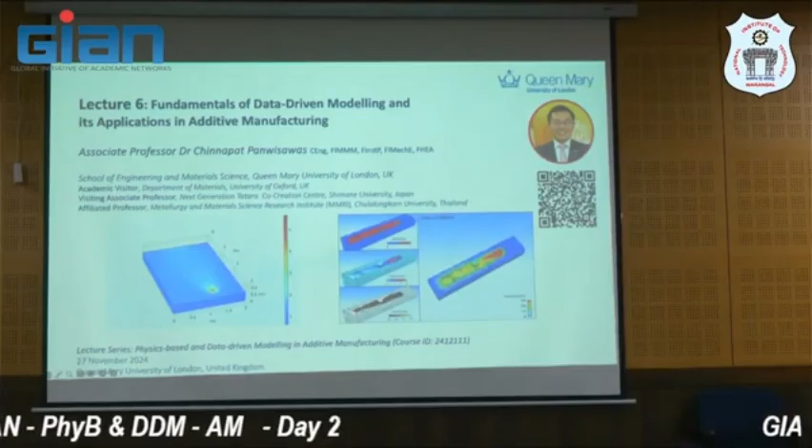Yeah, and this area. This fellow is making a lot of sound there. Kind of noise it is making. Okay, so I'm sitting here.

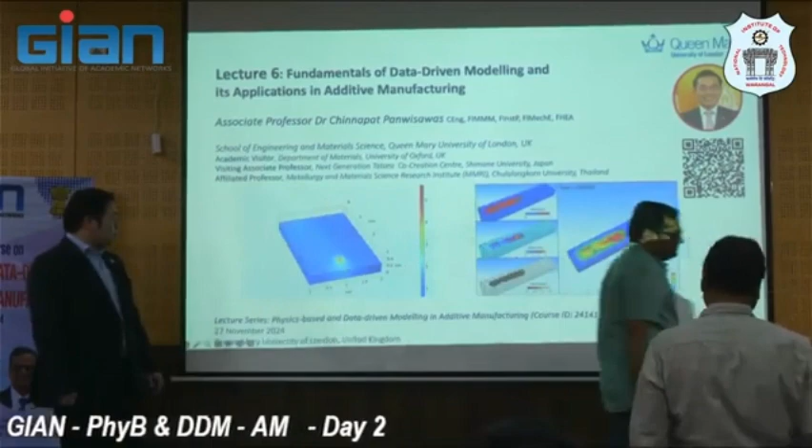No, they are suggesting that if this microphone, that fellow is making sound. If you switch off also, that is making noise.

It's okay. Are you able to manage like from here like this? Maybe. Yeah, okay. Sure, I'll try. Sorry for that. No problem, yeah. Making a lot of noise. Yeah, but only this one is quite quiet.

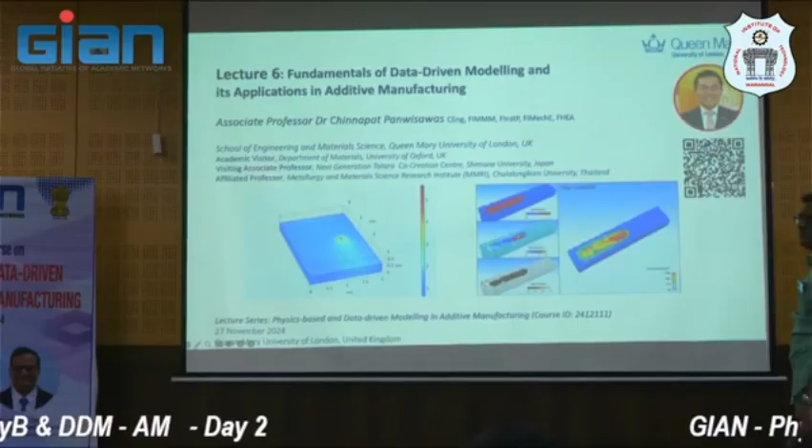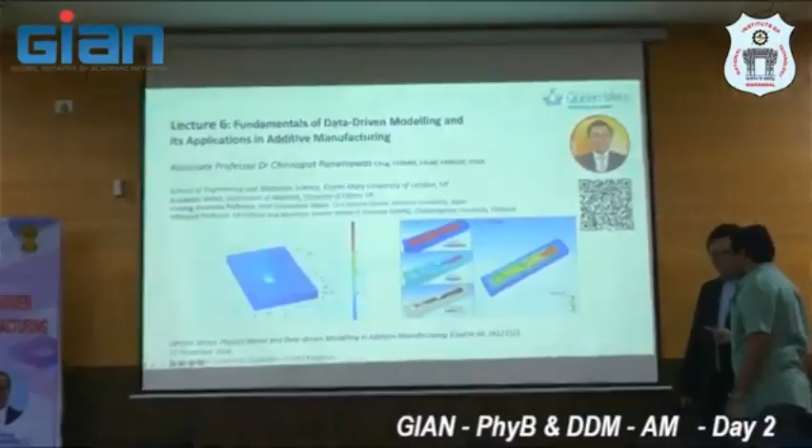I think probably, yes, probably it's time to start.

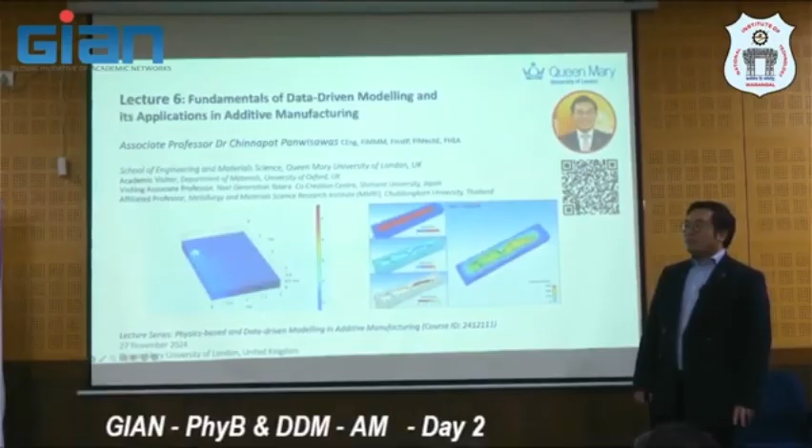So shall I start or? Wait, okay. So they are going to switch off the entire AC in the hall. That's what they are saying. That is the solution.

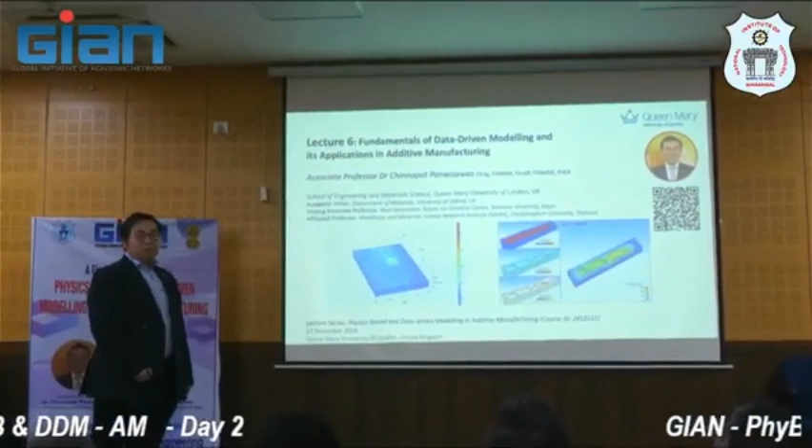Yeah, shall we start? Good morning, everyone. This lecture is actually dedicated to the fundamentals of data-driven methods and its application in additive manufacturing, basically simulation as well.

So I just want to start this lecture with these two examples. It's actually trying to predict, not exactly the same, but trying to do something for 3D printing. One is quite high fidelity modeling, another one is more simplified. So we'll talk today about how can we actually choose or how can we make this rapid calculation for data-driven simulation.

For example, so in order to start the presentation, I just want to begin with, I think we don't know much each other, so I just begin with what I'm interested in terms of research.

So my research lies into, you may know, I give a lot of things on the computational material science and engineering. And then using multi-scale multi-physics modeling, this is one of the things that you saw in the past two days, is actually related to, mostly, my research area.

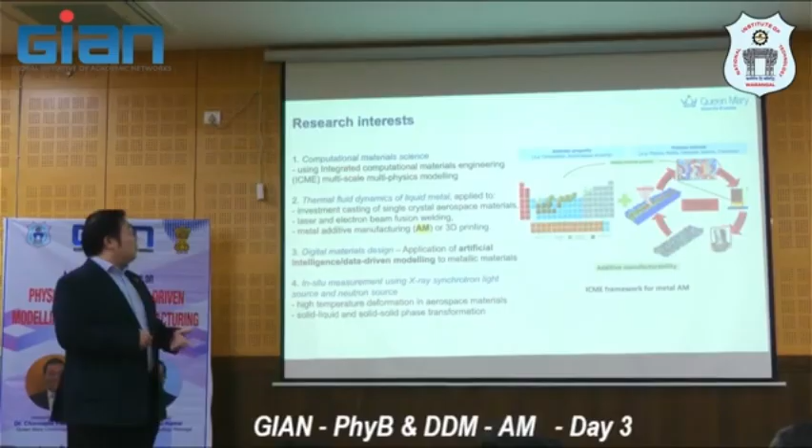And then especially looking at the thermofluid dynamics of liquid metal that can apply not only to additive, but also for casting, welding, and all laser melted or molten pool dynamics here.

And this is the thing that I think I'm also interested in, which is about the topic of today's talk. This is a digital material design.

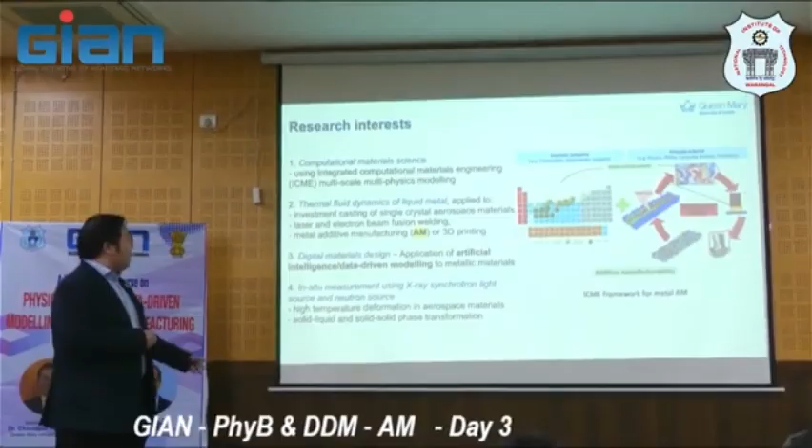So you will see that we need to use artificial intelligence and data-driven modeling to understand what is happening in the metallurgical process. And then I want to actually work with experimentalists, especially in-situ experiments through synchrotron or neutron diffraction or imaging to understand the behavior of the material during the process.

So it's quite fundamental understanding, not really going to the end user. But what we try to do is a fundamental for additive manufacturing that allows us to establish something more scientific-based model. So I hope to also highlight some examples that we have done.

So this is actually related to the model and the X-ray synchrotron published, I think, early this year in Nature Communications, for example, and also understand the phenomenon happening in additive manufacturing.

So physics-based model is basically something that we know is more preferable for the scientific community, but probably we need to find a way to actually validate it for sure, whatever how difficult it is, but with the most delicate or more advanced technique that we can use to look at what happened.

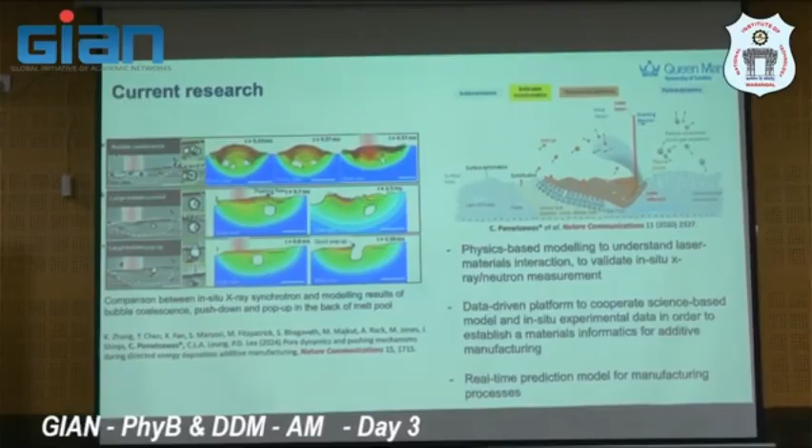At the same time, we also want to build this knowledge in order to build a science-based data-driven platform that can enable us to get some data-driven model established toward material informatics for additive manufacturing.

So the keywords here are quite important. From the material informatics, something I will give an example on the last day, the final day of this short course. And then another thing that probably benefits, someone will say about digital twin, is actually what we call real-time prediction for the model that we are going to give a bit of information today as well in this lecture.

So the next one is a more complicated thing. It may look to me, and probably to you, that it's not really additive anymore, but it's actually relevant in terms of fundamental understanding of chemical thermal fluid dynamics during the non-equilibrium microstructure process.

This gives us insight into extra information that I've probably dedicated one single lecture for, probably tomorrow as well. This is something I just want to share with you. This is a digital twin that we were probably the very first to publish for metallurgical process, using what you may know as a decoder or encoder for artificial intelligence or deep learning network.

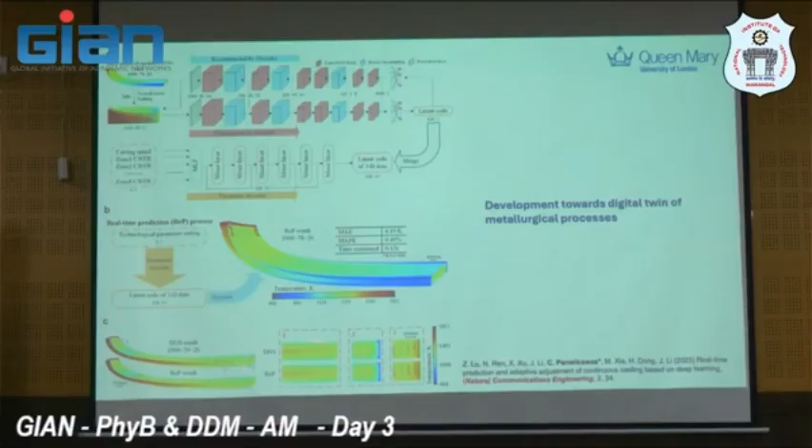This is not additive, but this is a casting for steel, so this is continuous casting in steel. You see that the model captured this characteristic in the physics-based simulation very well. So we hope we can develop toward this. Without any fundamental model here, we cannot get reliable prediction for the metallurgical process we're interested in. So this is just something to give you some background.

But before we go into the real content of data-driven, I want to say something about the buzzwords people use: data science and big data. There are two things to be aware of. Data science is actually the backbone for the next Industrial 5.0. I believe that. It's an integrative interdiscipline that bridges.

It integrates over computer science and technology, mathematics, statistics, and knowledge-based areas like material science or related areas. That brings into this big picture, meaning you need to work with a lot of people to make things happen.

This is also quite interesting for the characteristics of big data. Big data is not just the data, but you need volume of data, important whether small or large, or value of data - what does that mean, how useful the information you have, and then how accurate and reliable. This is another important thing: what is the type of data? Is there systematic correction of data to get reliable prediction or not?

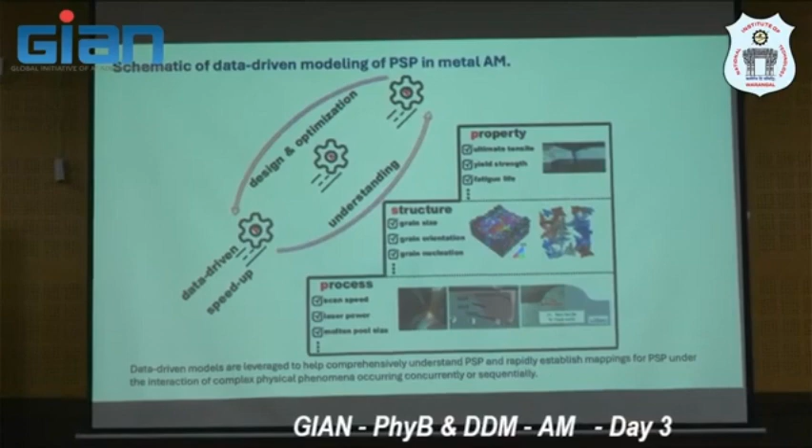Having said that, I want to open the scene of today from this paper on data-driven modeling of process structure property relation in metal additive manufacturing. You may hear a lot from me about the need to link process structure property relation. This is really the case for additive manufacturing to be successful - we need to link all this information together, not only from the physical model we're trying to do, but also the digital model as well.

So in order to speed up or make it data-driven, you need to understand the process, what happened at the process level, and the emerging structure. If it's small scale, we call it microstructure - grain size, grain orientation, grain nucleation. Then the property results from this structure. Understanding this is something we're trying very hard to do. It's not that easy to link, as you may appreciate from the last few days.

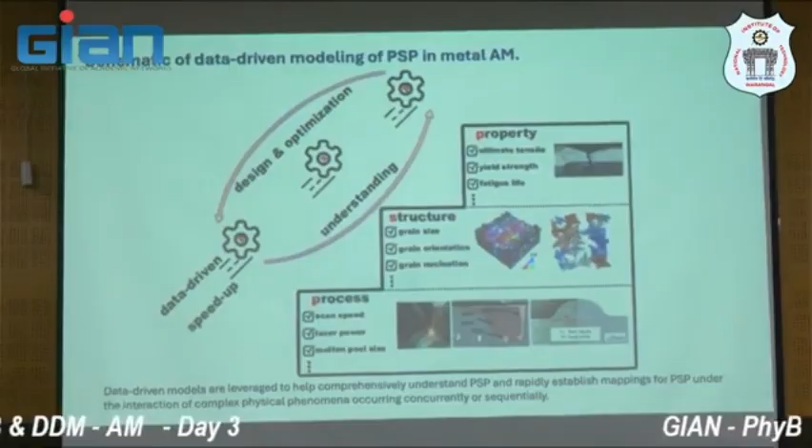At the same time, we need to close this loop to get optimization, design and feedback. Hopefully the data floating around here will be useful to develop comprehensive understanding of this process structure property relation, and then we can establish a model driven by data that gives comprehensive physical understanding. At the end of the day, industry wants quality control of their product, for example.

So the missing part at the moment is the brain for the machine learning. As a community, I believe you agree with me that we need to do something to enable science-based, physics-based, material science, or metallurgical-based knowledge for data-driven approaches.

So in order to do that, this is a conceptual diagram. For each sub-figure here, this is data-driven for the process model. I have one example for this in today's lecture. What does it mean? You have simulation and experiment data fed in, with the process parameter as an input and output as the parameter you want.

So we try to make this data driven as well. It doesn't mean only additive, but we split the driven process from each component here. So for example, this one will be...

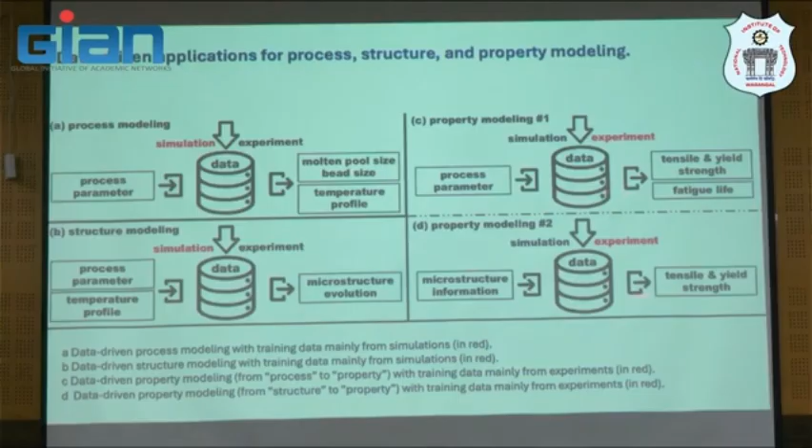Another thing is property model, which is of interest for many people. It's the same principle from process to property, or microstructure to property. Some people may look at process, structure and property, but many people look at process to property directly. Probably the link in the middle can be removed or whatsoever, depending on case by case, but we are trying to show you some examples in this area.

But it's still a challenge, as I mentioned before, that for process, structure and property, even if you do standardization or augmentation, it depends on complete integration of the data-driven model - who will be the first one to integrate and show it. Yesterday I tried to show some integration of cases in the laser fusion process that you saw. So integration is an important aspect.

Sufficiency and reliability of training data is another thing. You may need enough data to train and test your model in order to get more reliable predictions. Another important aspect, probably driven by methodology or engineering knowledge, is interpretation of data.

This is the part that's probably missing quite a lot - just data and data doesn't mean it's just data, there's also uncertainty quantification we're talking about. It's about what is the statistic or distribution of the result, rather than a single point result, for example. And then how can we use this property-structure relation to inverse design the material or component to get the part that you want.

But the next one, I think I'll start with the model that we want to make data-driven. What I mean by that is this - you may know that defects in additive manufacturing are very prominent, and we need to do something about that. Defects, which actually happen in additive manufacturing, happen at a very low scale, micro scale. Let's say this represents approximately the scale, and then the defect, which we'll discuss more tomorrow in detail in terms of engineering understanding.

But today we just borrow some concept of this. So we know this porosity is at the level of micrometers, rather than the thermal model in finite element calculation - the size of the mesh or grid is actually at the millimeter scale. So there's some mismatch between the feature we are interested in and the defect - the calculation element and the defect content don't match. So we cannot capture that in the FE calculation when we want to do rapid calculation, right?

So what shall we do? That is the next question.

Microstructure is in the scale of 10 to 100 micron. Roughness is also in that same scale, lower than 1 millimeter, apart from residual stress or balling effect, which is actually larger than the typical mesh size for finite element calculation.

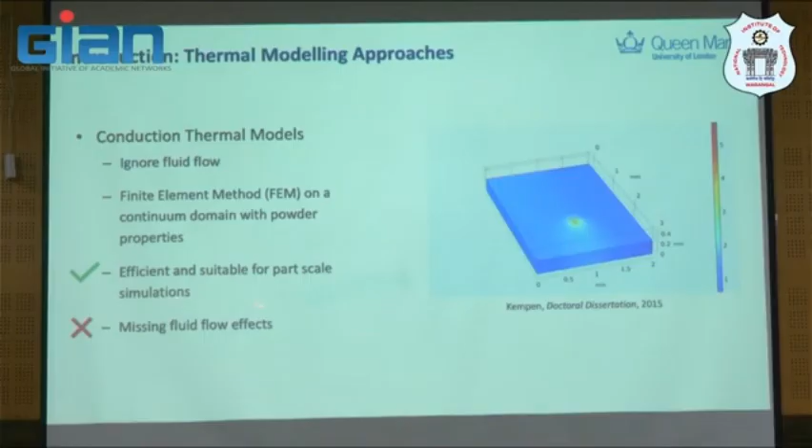I mentioned briefly yesterday that powder property is probably important. It's efficient and suitable for part-scale simulation, but missing the fluid flow effect.

Instead of that, this one is a thermal fluid model, and it uses an interface tracking method versus a flat rigid liquid-gas interface. With or without powder packing, it still provides some insight at the scale we want.

We mentioned earlier the defect scale, because that porosity is a process-induced defect, or whatever microstructure or roughness. So it's impossible for the previous model to predict it.

It's a more accurate representation, or prediction, but computationally expensive and limited to very few tracks. That's because it's limited by the computational resources you have.

So now probably you can print about 5 to 10 layers without any issue. But anyway, the objective of this particular piece of work is to try to build a framework for reduced order modeling.

Basically we want a clever thermal model that can take all the information of the fluid flow into account somehow. So we try to use temperature-dependent properties of powder materials, and take into account the effect of this by empirical or analytical equations, whatsoever.

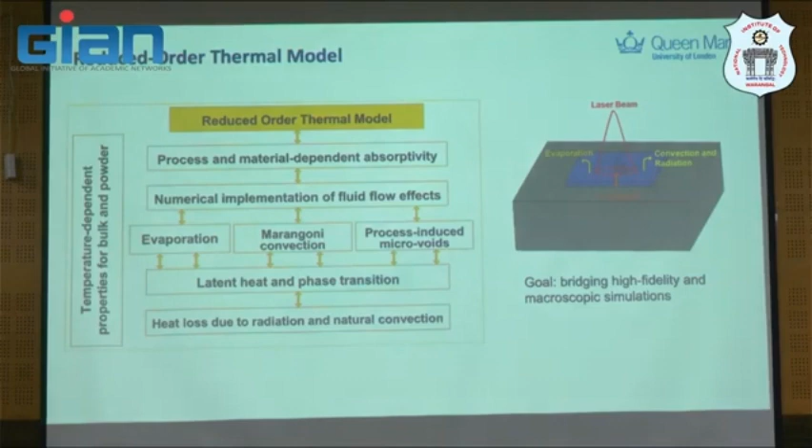So the feature is this: we have heat transfer, which is the relative main equation, because this is just one kind of more intelligent thermal model. There's nothing more than that.

It's just a thermal model, but we try to incorporate some other physical effects into this model by looking at the Gaussian heat source here. Whatever heat source you can identify, but actually this is a volumetric heat source.

It's not the surface heat source anymore. Heat loss follows the Stefan-Boltzmann relation, and then convection with this is normal heat transfer coefficients that you know and have to use a lot of time.

Latent heat phase transition is actually for powder property as well. You have phase of the gas and the powder, and try to calculate or understand how to incorporate the thermophysical property. It's just a model that we try to do, taking into account the powder and the fluid flow effect from the empirical relation. Again, this is not ideal, but it's something we do to basically take this into account in the heat model, and also the Marangoni convection in the thermal conductivity of the liquid phase. So all this thermophysical property, latent heat phase transition, and fluid flow effect has been taken into account.

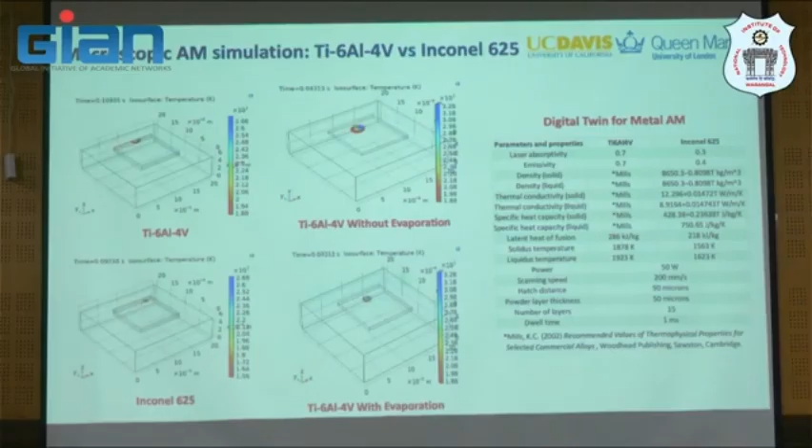Again, this has to be linked some way, somehow, with the lower length scale model to translate the knowledge across, so you can probably predict something closer to experiment without any expensive calculation.

We are looking at this as well for different system alloys mostly used in additive manufacturing now, from Inconel 625, 718, aluminum alloy, and 316 steel. By eye, you see that they're all different sizes of melt pool, just from the change in thermophysical property. Again, this is not an ideal situation, because each material has different optimized process parameters, but we just show this for the sake of comparison - you will see that aluminum probably melts a lot, for example.

And if we try to make this one more predictive, we try to calibrate now with available data. We use the mesh size quite small here, and you see the melt pool is actually in the size of 150 to 200 microns. Going back to literature from SEM, TEM, or SEM optical microscope, this is the size of the melt pool that we see in the experiment as well. So this is the dream that we want to have - quick, but not very quick I would say, at the moment, with just a single laptop or workstation that we work on here - that we can capture some things probably similar to experimental nature data.

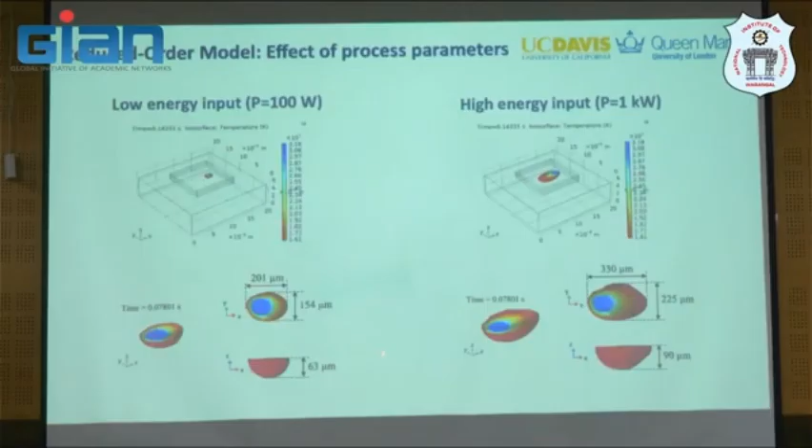But that does mean this is one attempt that we try to study this for the dependency of the property. One additional aspect: we can do multi-track, multi-layer AM. That means we can deposit whatever you like, layer 1, layer 2, layer 3, layer 4, and layer 5. And you will see that the melt pool is not actually what we call steady state. In welding, probably you can say steady state, but here the heat beneath actually contributes to the size of the melt pool for the next layer and the next layer. So there is no such steady state in additive if we don't control it very well. So this is one message from this slide.

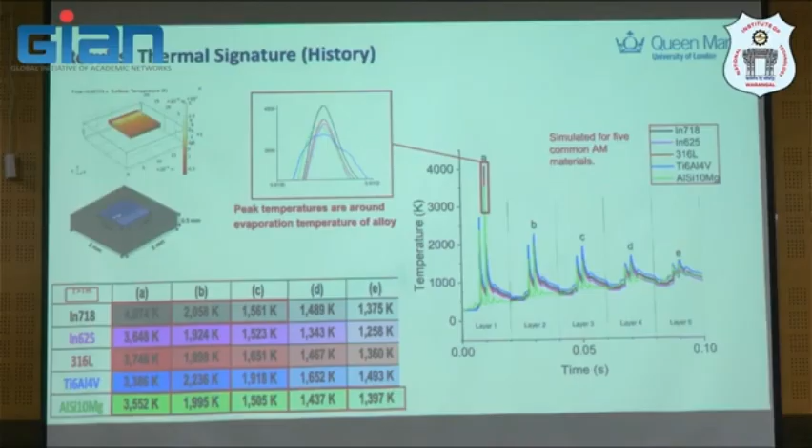And then if we try to understand this thermal signature a little bit, we build this 1 by 1 millimeter cube here, and we can extract classic thermal signatures for different layers and different materials as well. The information from this is quite useful - I will have some examples a bit later - showing that this peak temperature is important in so many ways possible that we can think of. One example we can see is that one question we can ask from this model is how many layers beneath this material has been remelting.

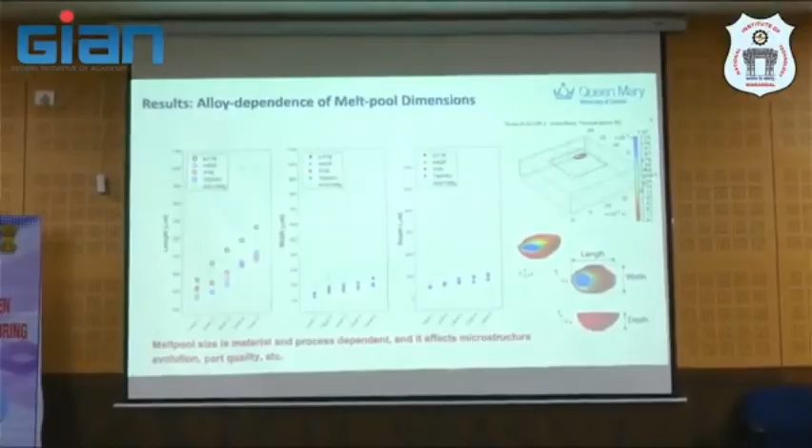So we quantify this alloy dependency of the melt pool dimension as well. You will see it's a bit different, apart from this aluminum, which is behaving so differently from others. And then you can characterize and get some feature that actually CFD people are trying to predict.

But the next step for us, you will see the model doesn't take into account the defect which is formed during the process yet. What statistical approach can we do to approximate the defect which is formed? Because the formation of the defect during printing is also important to make the model more reliable. And then we try to capture this based on the simulated defect, which we will talk more about tomorrow.

How can we get this distribution from the CFD model? And then we try to do something in MATLAB to generate the same kind of defect with the same distribution, so that the information translates across - this statistic from the process, either from model or from experiment. And somehow you need a numerical approach to actually translate this across your calculation domain to capture it.

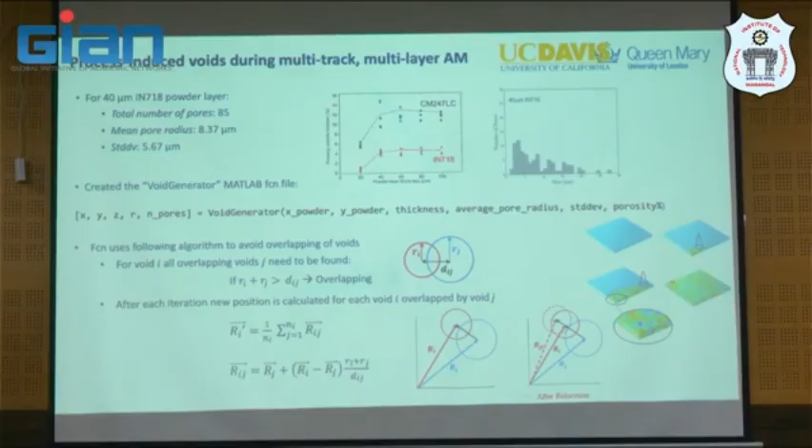For example, this is a conceptual idea - the color bar here, red means more porosity. So somehow this will impact your residual stress and some other property.

So this is probably the first step. We actually define the defect based on the data from a lower length scale model or experiment, and then identify this thermophysical property that replicates the presence of this defect. In this case, it's a void, a small pore.

So if we just prove the concept, we have only one defect here, present only one porosity here, and then we try to see the effect of this. You see this is the thing - I'm just checking if this is moving.

Okay, no. And you see one porosity actually increases cost of computation. This is something that the community needs to discuss and try to move forward on. With and without the pore, the peak temperature has been shifted by this - so this is something to consider.

For the accurate prediction of the temperature, I will have some slides talking about how important this is in a bit later. So, the next step, once we do this and we believe this is good, we can do a data generation algorithm from that.

Rapid calculation, I would say, is what I showed you before. And then we generate this data combined with some understanding from our previous CNN model here to capture the measure and the predicted here. We try to do the same here using the CNN architecture that learns the data and process parameters, laser deposition pattern whatsoever, and then use some deep learning to get the predicted temperature field.

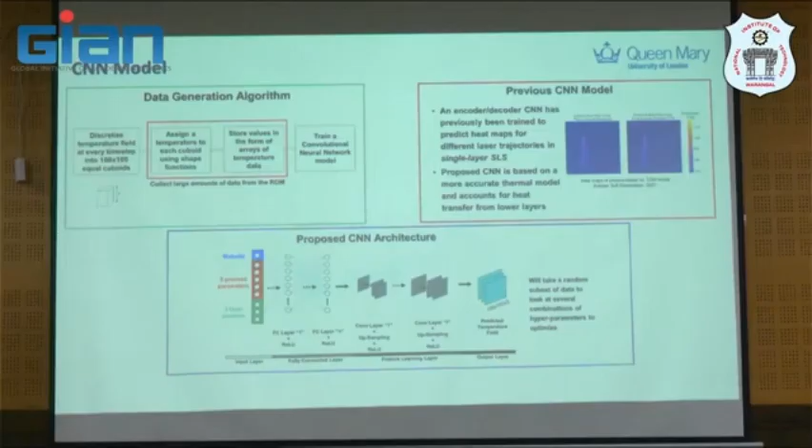Again, this is based on the image that you get from the result, or if you want to do it like extracting from the coordinates in the data, that's also possible, but it depends on how powerful the code you write is to make this possible.

So just to summarize the first part here: the reduced order model, we try to bridge the macroscopic and high fidelity simulation. It's easy to actually implement in other material systems - it's not just what I show you here.

And we hope that the data generated from this model - model generated data - can train a CNN model that can complete, how to say, the data-driven model here. And we hope to develop a physics-based thermomechanical model that can couple this with mechanical analysis. Again, there's still a lot of work to be done, but this gives you a kind of beginning picture for the data-driven model.

But we want to do something more fancy - that is the path scale analysis, but this data-driven model is also used in the melt pool length scale as well.

What happens if we don't want to run the CFD now, but we just want to have data-driven methods to represent what happened in the CFD simulation, the melt pool simulation? A group from, I think, University of Pittsburgh proposed a framework called Computational Fluid Dynamics Imposed Finite Element Method, or CIFEM.

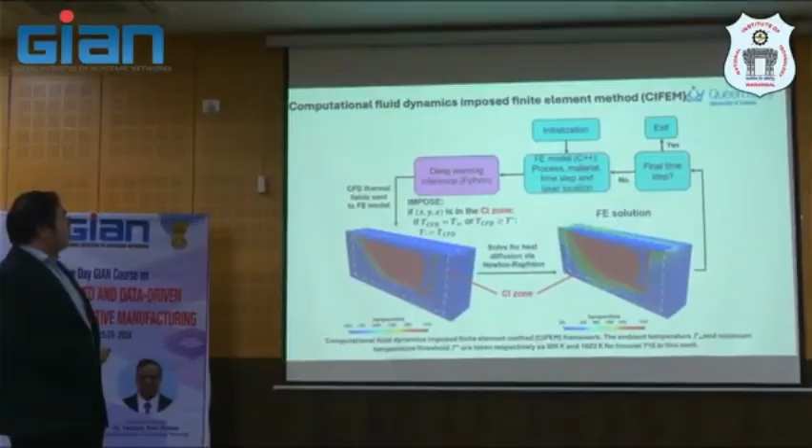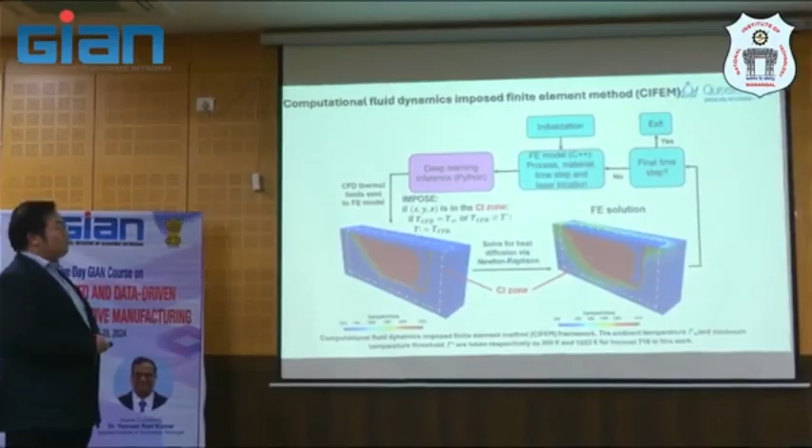What it does is try to learn from the high fidelity model using an envelope called the CFD imposed zone, which captures what is happening in the melt pool moment, and then tries to solve the heat equation. After they run the CFD, they generate the CFD using, I think, Flow 3D. After they get this data, they extract it, digitalize the result, and solve for the heat diffusion using the Newton-Raphson method, feeding into a deep learning FE model process.

Then what they do is use this data to train the model under the framework called CIFEM, and see how good or bad they can predict melt pool simulation in detail without using CFD calculation. So this is what they do.

They have CFD data feeding in for the heat source model, and then they have an encoder and decoder to predict the thermal field. I think this is based on images, and then they use this CIFEM interface to predict the thermal field as well.

The key feature is that a 2D transient CFD thermal field is provided to this encoder F that encodes each 7,800-dimensional input into a 20-dimensional latent representation. The decoder G decodes the learned latent representation back to the original input, combined in a network. After that, they train the neural network model to minimize the mean square error. I don't need to repeat much about how neural networks work.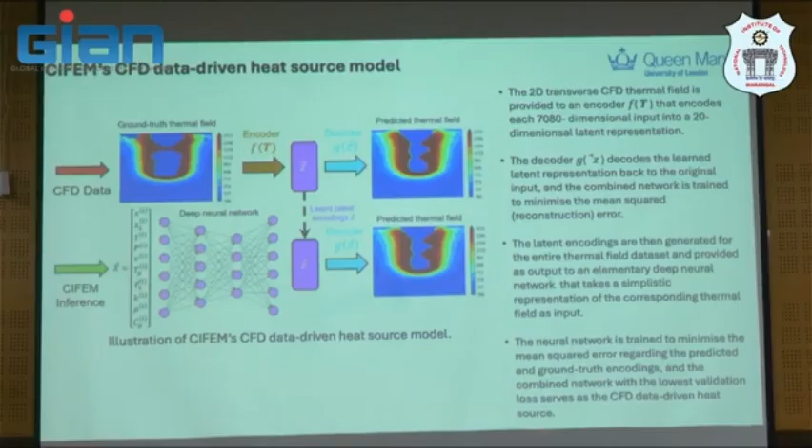But the good thing about this is that they try to do something with additive manufacturing. This is the epoch loss history over time intervals for training and validation. You see it's quite good fitting for both models, the deep neural network and the autoencoder.

This is used to predict the melt pool size, the CIFEM used to predict the simulated melt pool size, compared with experiment. You see it's not too far off from the actual melt pool size. I'll show you more insight a bit later.

This is the size dependence across 20 different process parameters, so they train across these different parameters. But another goal is to make the model more generalizable, so they train it with unseen process parameters and see how good or bad the model is.

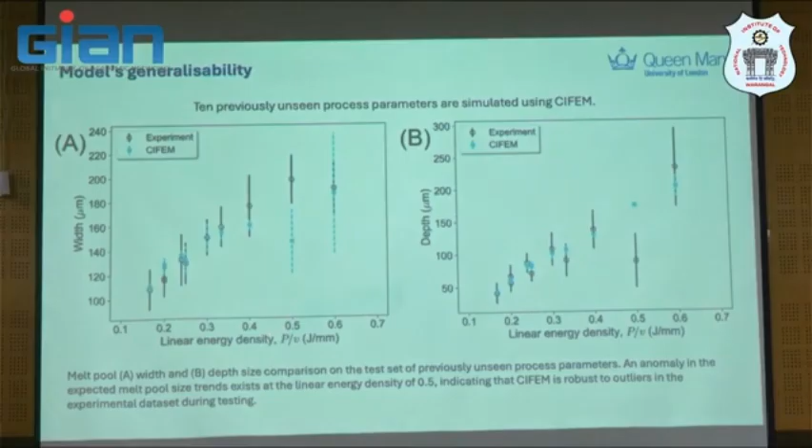That means they can capture somehow, but not as good as before. The accuracy is quite acceptable, but not ideal. If you see here, after that, they try to understand it further.

Later they use this model to compare with different conditions, where P represents different process conditions, against the available CFD model that they ran. You'll see the difference is quite minimal between the CFD, which is heavy calculation, and the neural network calculation they have - CIFEM is precise.

This is what happened, comparing what you see. This is CFD - you see a lot of oscillation and undulation at different conditions. This is a different condition here. Then they see with CIFEM, it's not too bad, but it's not exactly the same. You can see there are some differences.

Ideally, you want something even simpler, so it's just a Goldak equation here, just volumetric heat. It's not very good, but they capture something. You don't get any depression zone, you don't get any oscillation, but okay - we try to ask ourselves whether this kind of model is good enough to drive the technology forward.

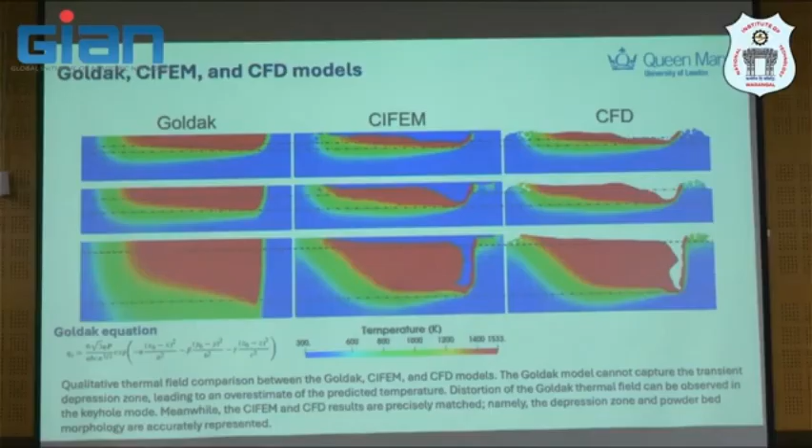Then they compare the thermal field with the size of the melt pool. Again, you'll see that the CFD kind of model is probably the best match. This is the quantification of that model.

You will see how good or bad the deviation of this model is to each other. So that is a good step forward that they train about, I think if I remember correctly, about 800 models here or condition. So it's a large set of data.

And this just gives you an impression that the total parameter here is 13 million parameters. So a contractive auto-encoder network architecture has been used to get the result you just seen. And the deep neural network architecture here has about 400,000 parameters. So it's not an easy task. It has to be collaborative, something that we want to move the technology together.

This is another thing which may interest you, which is data-driven analysis. Again, this is analysis for the process structure property of Inconel 625, Inconel 718 thin wall. But this one is not powder bed fusion, it's direct energy deposition. I just want to show you how they do this data-driven framework here. So what they do is actually deposit the thin wall of Inconel 718 to capture all aspects from processing, structure, and property.

And this is what they do. They have infrared temperature measurement at different locations. As I told you before, each location has different thermal history. So they extract this thermal model here, validate it with the IR thermal imaging, and then get the analysis for the cooling rate and solidification rate to predict property.

I will tell you what they did. They actually predict UTS, yield stress, failure stress, modulus, based on the thermal data they get. And they use the 1D convolutional neural network to extract those features. They can even predict the primary dendrite arm spacing, which is important for the property later as well.

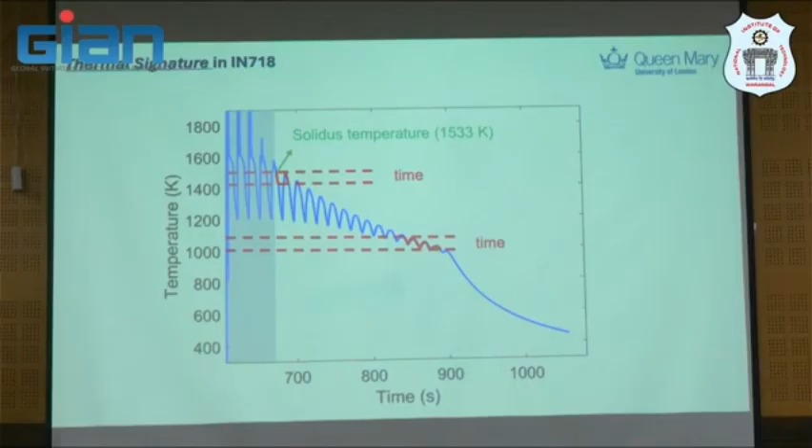And then you can count here, before it's actually solidified, there are about 5 layers that are melting down into the substrate, I mean underneath the layer. So, this specimen has been carried out to compare simulated and experimental thermal history.

So you will see at different locations as well, at different 12 and 8 locations here. So what this says, actually for case B, when A, B, and C follow here, you see the microstructure that results from these things are different, and they have different cooling rates. As such, they get different primary arm spacing, and then they can calculate approximately the Laves phase, which is a detrimental phase for each condition.

So they can predict UTS, yield stress, fracture failure stress, and also modulus here as well. So if we look at the specific condition on case B, which is a bigger build, 120 millimeters at 3 locations here, you see the microstructure is not the same at locations 1, 8, and 12. And then these contribute to different property sets as well that they can predict here.

So it's quite encouraging actually that the data from this data-driven approach can provide such insight in a rapid manner. Again, you will see now data-driven is not just data, it's meaning something for the manufacturing process. That's what we want, actually.

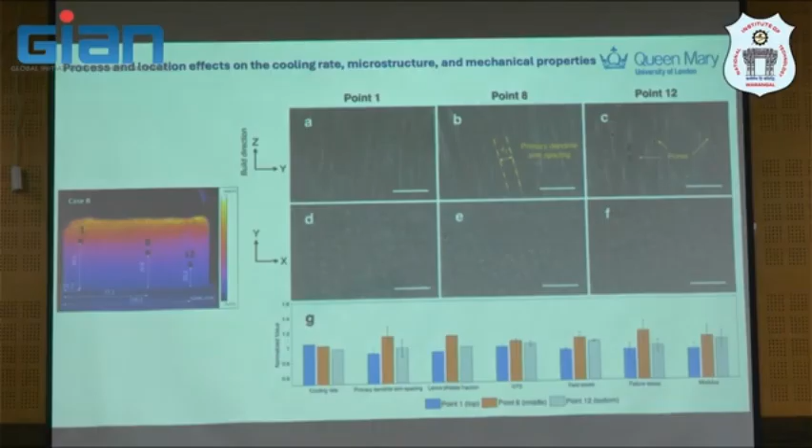So they characterize or analyze the primary arm spacing as a function of cooling rate, because if you are a metallurgist or material scientist, this will be a very important aspect to understand, because it will tell you a little bit more about the defect which is formed in the later stage. And there's some correlation across the many cases that they run - again, impossible without any neural network, if you want to relate the temperature field and mechanical property.

And I will show you later that. You will see here the temperature field, or peak temperature, has a significant influence on the property. That's why we have to control this.

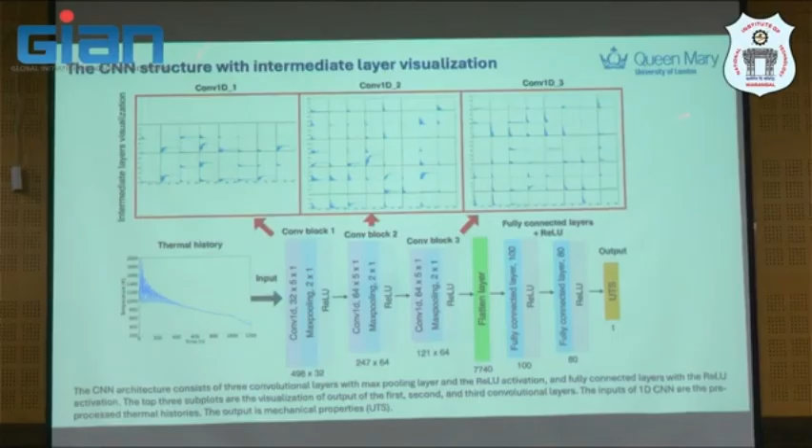Based on this CNN structure with the intermediate layer visualization in different conditions, you can actually predict the UTS and compare it with the CNN model's measurement and prediction. The training data is quite well fitted, and the test data is not too bad, but not ideal either. At least we get something rapid, recalculated.

So, next one, as I promised, the data-driven model isn't just a model that finds its use on its own. If you are an experimentalist, you may ask me: what is the machine learning that enables autonomous microstructure characterization in 3D printing? So this is what happened.

They try to build a model used for real material characterization. This is the ML method for autonomous microstructural characterization in 3D polycrystalline material. The first image is from correlative microscopy, giving you the 3D structure.

You first write an algorithm to identify the local structure topological classifier, and voxelize the process based on the image you have. These are all numerical or statistical techniques used to do thresholding of the boundary, then clustering algorithms and refinement, because the boundary is quite stepwise. So you may need to smooth out the microstructure and optimize back to get this, for example for atomistic calculation.

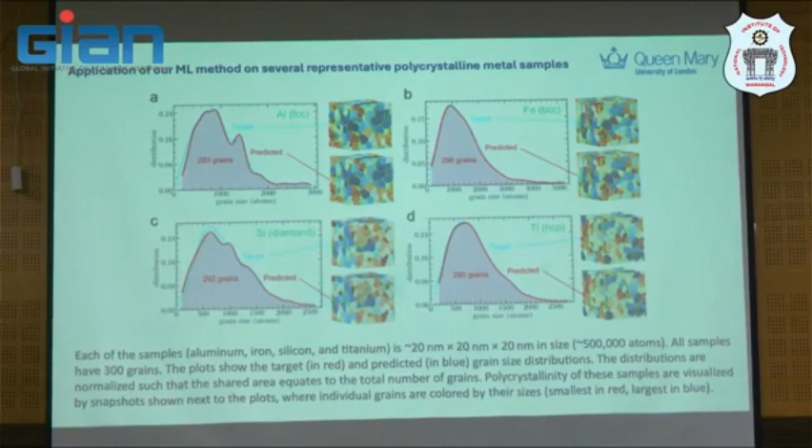This method has been used to represent different crystalline materials in metal - not just nickel-based superalloy, but also aluminum alloy FCC, iron, silicon, and titanium. The size of this is quite good - they can learn and represent the structure in 3D. It's used to compare the predicted grain size with the actual grain size in Inconel 100 nickel-based superalloy.

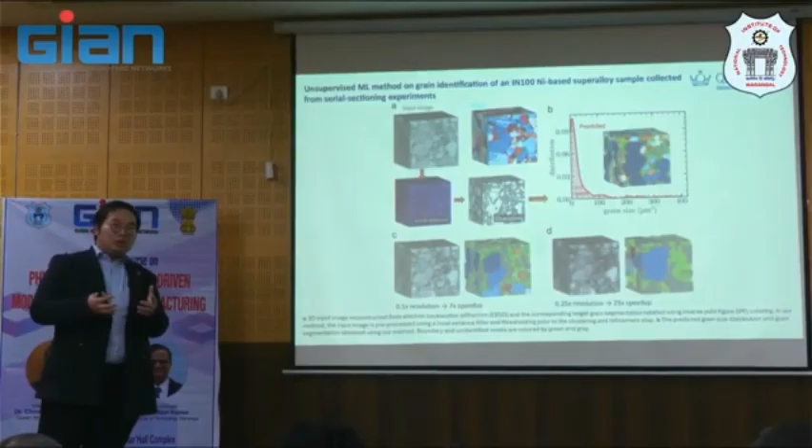I'm going a bit fast today, but I think there's some detail we need to take care of in terms of understanding data-driven approaches. It's not just image analysis to get something - we need, as a community, to use this data-driven approach to do something useful or meaningful for engineering applications.

If we go back a little, I want to spend more time on this. What I want to emphasize is that in-situ monitoring is quite important - the thermal history is the backbone of future technology.

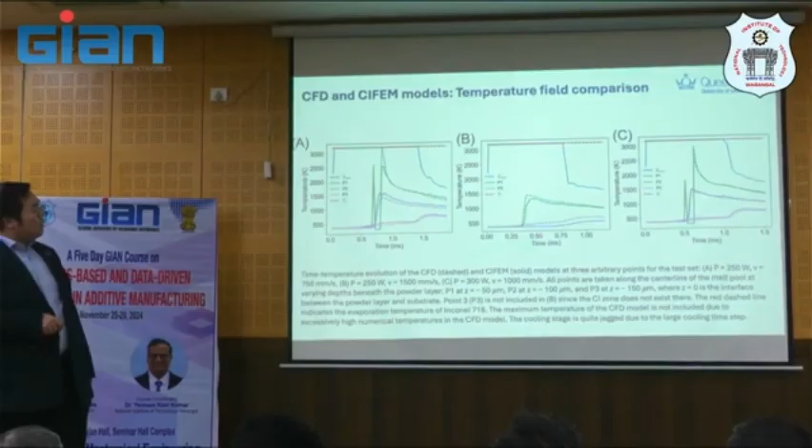People may have thermal imaging things - here you see a temperature prediction from a model and high fidelity modeling. These contribute greatly to the prediction of defects underneath during 3D printing. As you see, this one can capture it, but imagine if you can combine this with the approach in another additive manufacturing process.

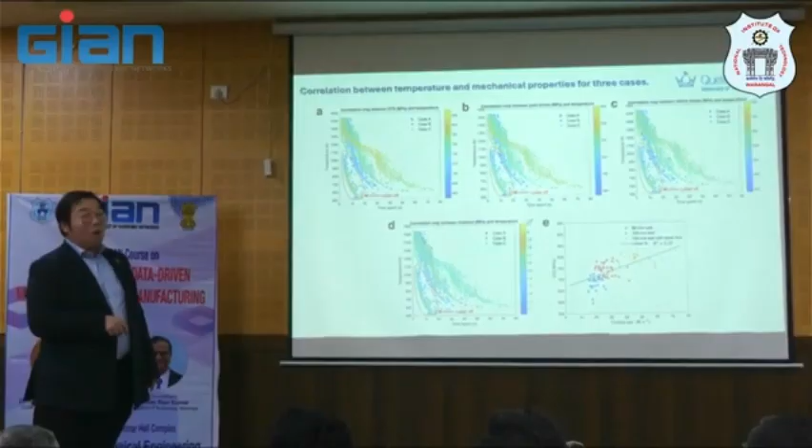We can actually get the relationship between temperature and mechanical property. This is a perfect scenario where we want to predict as a function of cooling rate, and you'll see the property has a correlation with the UTS - this is the ultimate aim we want to achieve.

Another aspect I want to emphasize is the stochastic process. We're trying to predict the trend, the statistic, the distribution, and also the noise of the process, which we want to reduce as much as possible to control it. So the way forward is to control the noises in the system, allowing us to do quality control of additive manufacturing for specific material, machine, and process conditions we want.

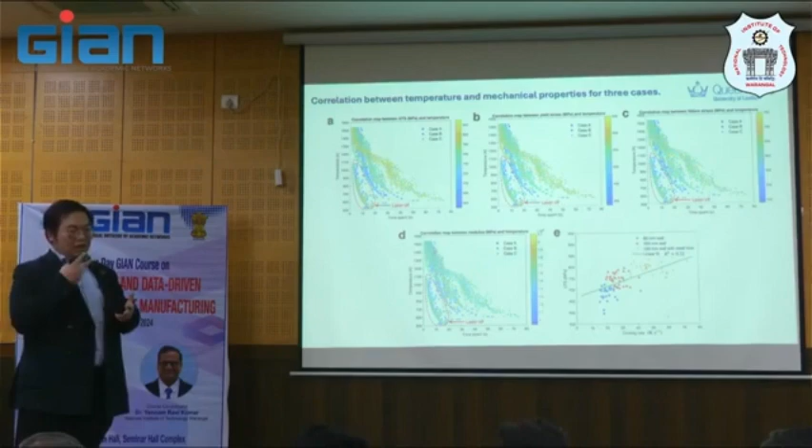I think I want to open for discussion now. If you want to ask anything regarding this, please go ahead - otherwise I may have to have another session.

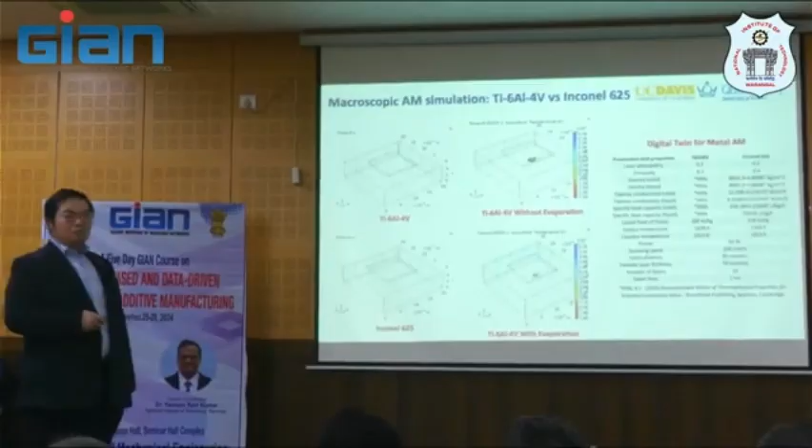So I would just want to ask, with evaporation there will be vaporization of the element. During evaporation, they will take away heat from the melt pool. So will there be reduction of the high peak temperature of the melt pool as well?

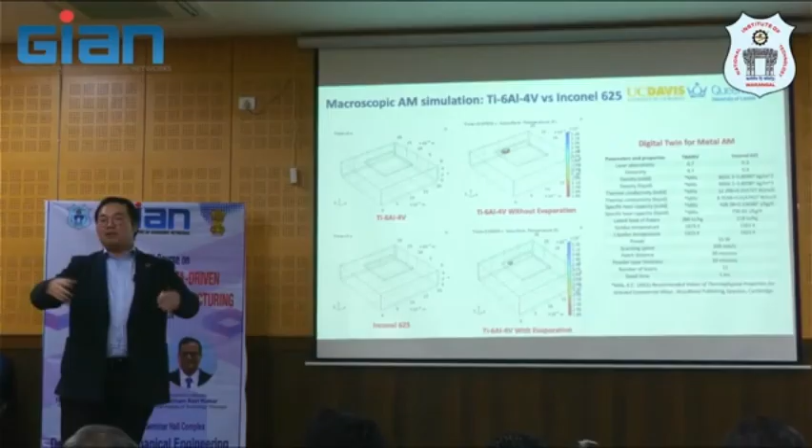Yeah, when evaporation kicks in, because if you solve the normal thermal diffusion equation, it can go to a ridiculous number like 10,000 degrees centigrade, and this is not realistic because nature doesn't allow this to happen. Once you get to the boiling temperature, there will be some dissipation, so the temperature usually never goes up to the boiling temperature. We damp that temperature down due to the latent heat needed to damp it down. That's why the heat contained in the material is actually lower, and once the energy is lower, the size of the molten pool is smaller.

Sir, in this case, in the legends we are seeing over here, the peak temperature is somewhere around 3200 Kelvin, both these legends, with and without evaporation. Without evaporation it's about 3,000 Kelvin, which is around the boiling temperature. I'm just asking whether the peak temperature will also reduce in case we consider the effect of evaporation.

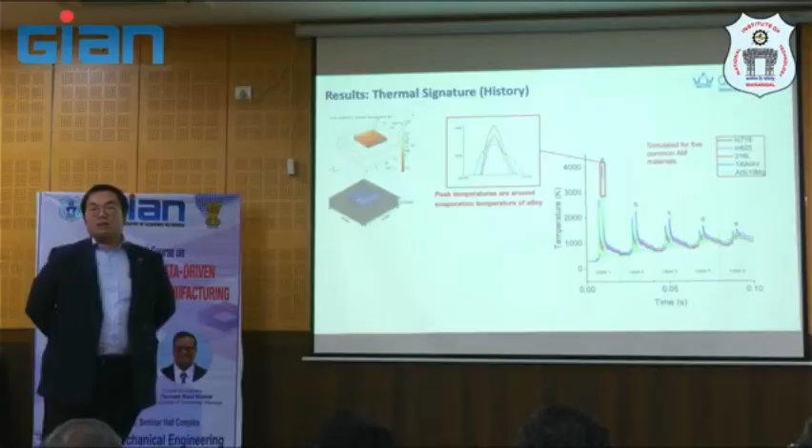Yes, if we consider evaporation, peak temperature will be reduced. Previously, if you don't incorporate the evaporation term, it will overestimate your temperature. But in the legends it was shown that in both cases the peak temperature was near about 3200 Kelvin. Which one, back slide, previous slide please.

Previous slide, more, yes, over here. In both cases, as per the legend, it shows that the temperature is 3200 Kelvin in both legends. Okay, how to read it, this is something to be careful about.

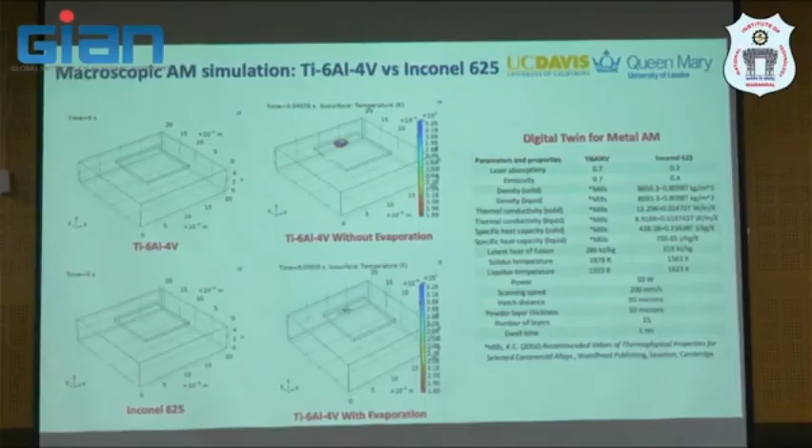So that means the top one is actually blue, right? Yeah, that means any temperature above this one is also blue. So this doesn't show the absolute value here, it just represents that temperature above 3,000 something will be blue, and you see the blue region here is larger than this one. But the legend would have scaled as per the highest. Yeah, sure, that's correct, but it's actually around something ridiculous like 10,000.

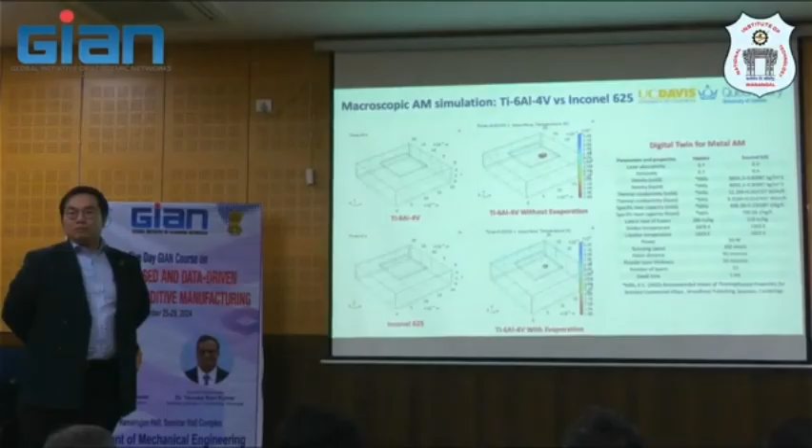One more thing, so you have discussed using deep learning architecture, CNN, and other things with this CFD model, right, in some slides. So how can we incorporate a physics-based loss function, and what kind of physics, in case of welding analysis or laser powder bed fusion, should we consider to incorporate a physics-based loss function within our deep neural architecture, meaning CNN architecture or something like that?

Physics-based loss function. Typically we use loss functions already available from TensorFlow or Keras. I'm not sure I understand your question correctly, but if I'm trying to answer it, I understand you're asking how we can incorporate physics-based loss functions in machine learning.

So what I show you, probably in the next example, is actually we learn the data from a physics-based model. You understand, so it's basically image analysis, just image analytics, so that's what it is. So that means the result already contains physics. But if you ask me another way, probably not in this case, if it's applied to something like alloy design using data-driven methods as well, you may need a kind of equation to incorporate the physics into that. Again, that is not applied in the example I showed you.

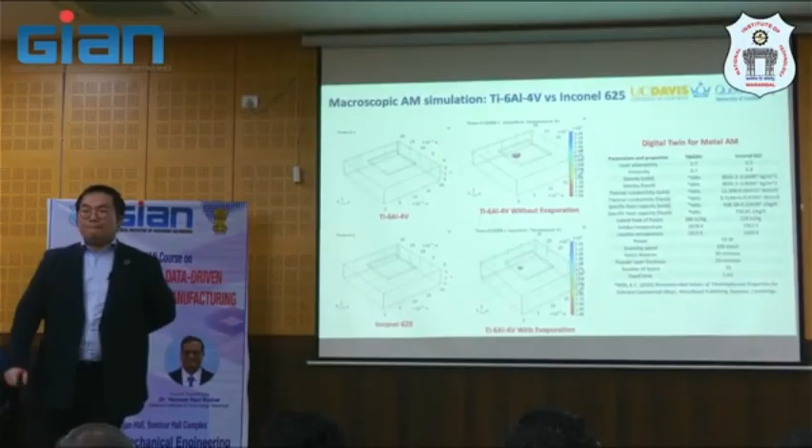Yeah, okay, but typically people are working on this physics-based deep learning architecture where they use Navier-Stokes based loss functions into their model. Yes, yeah, that is another approach. I understand that, but that means they want to run the model separately taking into account the physics base. That's also a way to generate the data as well.

You had shown that Goldak volumetric heat source was not able to predict the temperature fields much better compared to the CFD based model, right? So in case we replace the Goldak volumetric heat source entirely with the conical heat source distribution, volumetric heat source distribution, then in principle we might be comparable, I guess, right?

We just want to try. I believe they also tried as well, but probably this is the best match, the analytical equation that matches. But it's not ideal, as you know. If I want to comment on that work, they only do one track. What happens if you do 2 tracks, 3 tracks? This will be different again.

I'm pretty sure analytical solution cannot capture that. No, I'm not talking about the analytical solution, I'm just asking if we compare with a different heat source model, heat source distribution that is being incorporated into it. I think probably a good trial would be if we can use learning to come up with a new heat source model that represents this data.

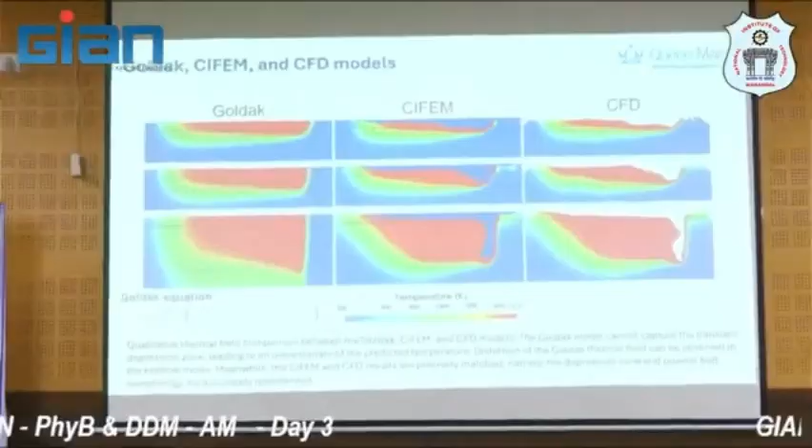I understand this is the one you asked, right? Why does it have to be this one? Actually, they are using the Goldak heat source model, right? So in that case, if we use conical heat source distribution, it could be comparable to the CFD result.

In some sense, if we just want to compare the thermal behavior, yeah, of course, you can have another column here with another conical heat source also and see how comparable it is. That's what your question is, right? Yeah, sure. Thank you.

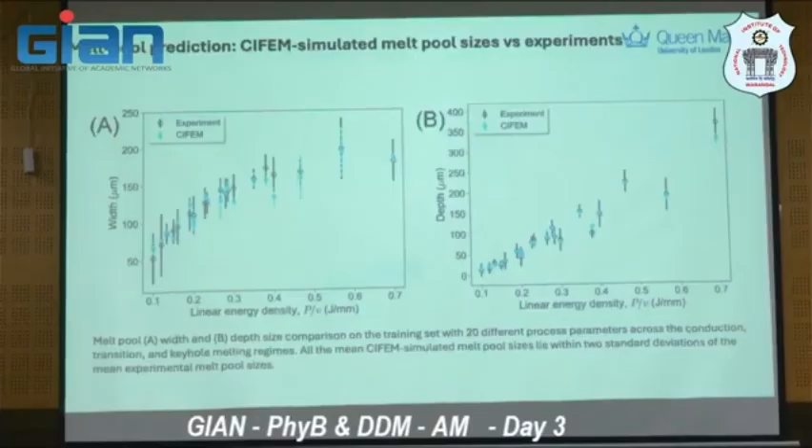Can you please explain a bit more about the reverse engineering part? There was a slide in the previous presentation on reverse engineering. Go back to find it. Can you please explain a bit more about how it's working and all?

Yes, let me elaborate. I just want to show that they have the inverse and forward design. So basically you have the forward design, straightforward from process, structure, and property, and the inverse is just from the property you want, you can decide what process condition will produce that. So you reverse your design.

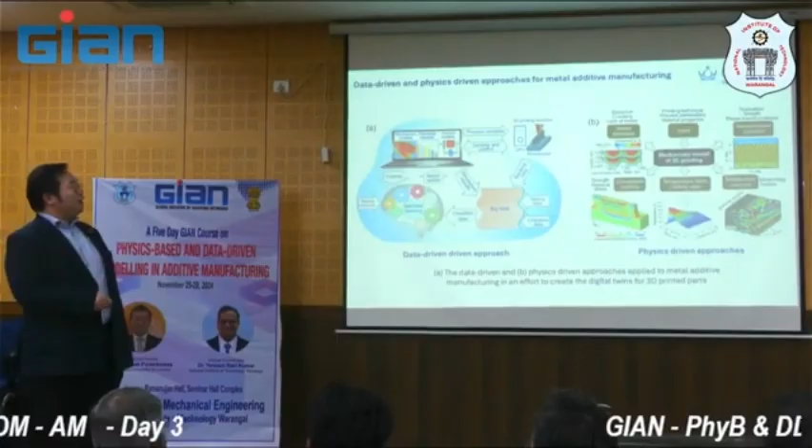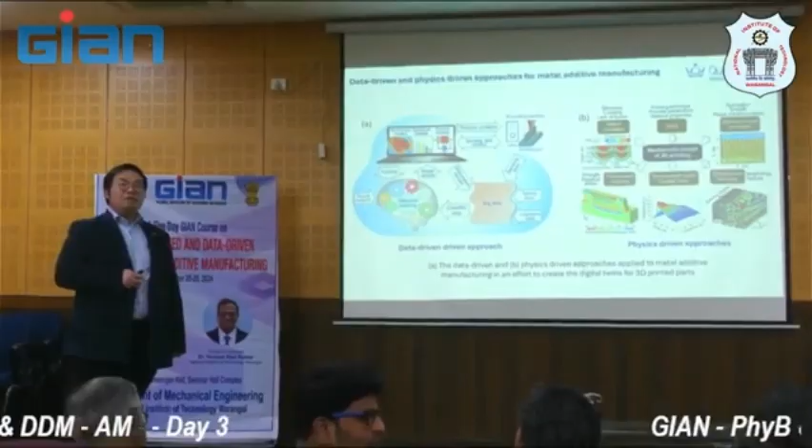I just want to know how the physics is captured in all these models—whether it's using PINN, physics-informed neural network, or some analytical models to capture the physics from the microstructure level to the property correlation, the structure-property correlation. You mean if we use the machine learning based model, right? Yeah, physics-informed neural network or something which includes a physics loss term to capture the physics-based approach.

Probably a similar question as you. I think from here it is learning from the result of the model, from the high fidelity model. But if you want the physics-informed neural network, it's probably applied to, for example, alloy design, another thing. So one way we do it is we inform it from experiment—you may extract some empirical equation, a simple one-line equation, feeding into the neural network algorithm, or you extract the relation from, let's say, fluid flow from a model, again a simple analytical equation into that.

That is how I see people do the linkage with physics, what we call physics-informed models. Before that, you may need to use some knowledge from materials or engineering to screen the data, so the data is not just the data. If you have a million data points, you need knowledge-based screening and clustering before training. Tomorrow we'll have an example showing that in some cases we have to cluster between different sets of data—say this belongs to one grain and this belongs to another grain, for example, at the microstructure level. It's a combination, and that will definitely make your neural network or machine learning more clever.

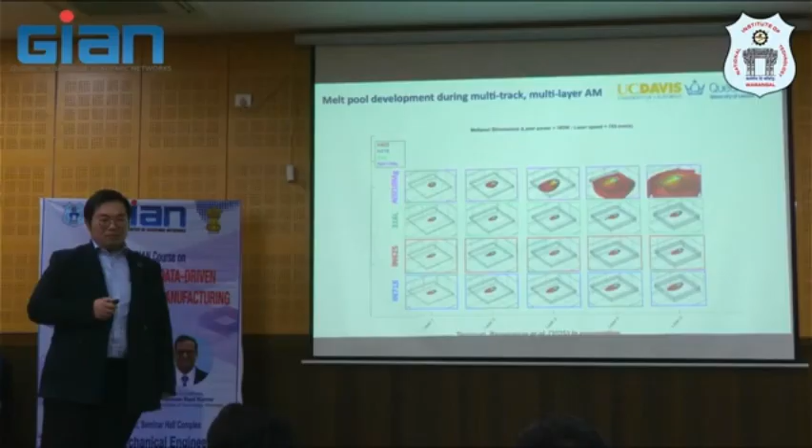Understood. So then how representative are these models—is it okay to compare with the same laser power? That's why I said at the beginning that this is just for the purpose of comparison. But in reality, we need to optimize—we need to select the optimized condition for each material to simulate.

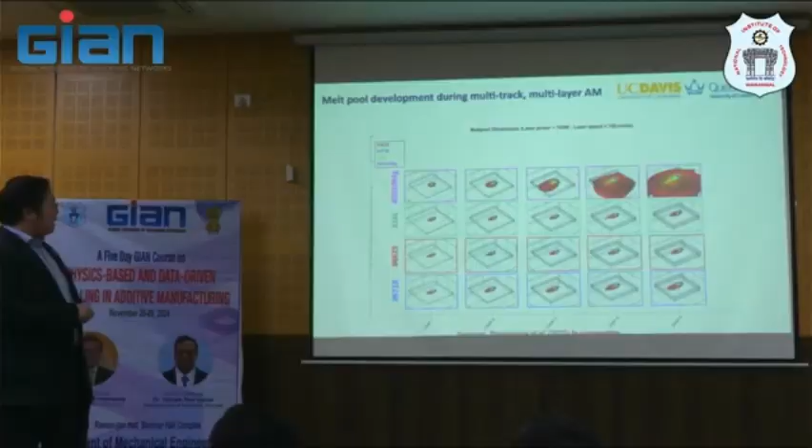For demonstrating the thermophysical property dependency of this process, just for visualization, this is what we show. I appreciate that these three have a similar melting and liquidus temperature, but not this one. You're right, completely correct, but this is just for comparison.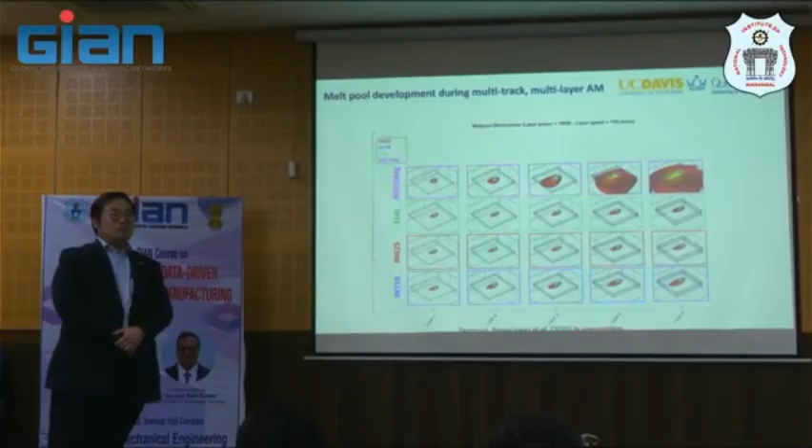Or have the data—so usually we go for those high fidelity tests, but they are also based on some physical model which has some assumptions, and they are usually away from... So you said high fidelity model—what is a high fidelity model different from a physical based model? No, they are the same. Yeah, they are the same, and we usually take data generated from them to train our data.

Yes, the data-driven models. But usually they are away from the reality or from the experimental data. Yes, so we usually get asked this question: why didn't we use experimental data to train our data-driven model? So what is your take on that, how do you answer this question, or how do we?

I think this is a very good question, but in my opinion it depends on what you are looking for. If you are looking for microstructure prediction, for example, at the moment only experimental data, which we generate a lot, can be more reliable for training. We have evidence of that. But the problem is if you collect data from different conditions and places, they may become inaccurate. They have biases, so it's not systematic collection. This is another question: whether you can get systematic data that we can use for reliable prediction.

But modeling is definitely more systematic, in the sense that you know what to do, and then you start generating tons of data given your resources. We need to work together to make the model's prediction closer to reality, because that means you remove the necessity to do experiments. That is the goal — we don't want to run expensive experiments on expensive materials. We're trying to make the model as intelligent as possible. I hope not too far from now we can reach that point.

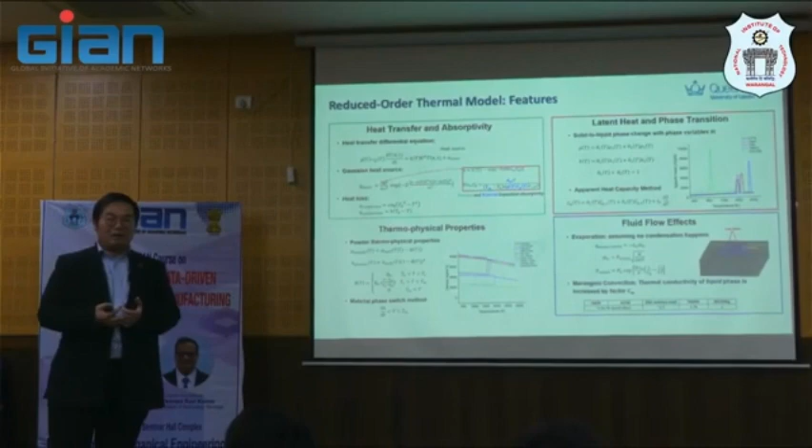Very good question. I think this is another area of research as well, thermophysical properties. That's correct, because we rely on what we have at the moment. We try to do something using, as I told you before, the fraction of the powder, and then assume the bulk property will follow that. Again, this is an assumption — we don't know whether it's correct, but we hope it's better than just using the bulk property, since the bulk property comes from a different metallurgical process. There will be differences, and these may be important to the predicted peak temperature. This hasn't been fully investigated yet, but some commercial software packages are trying to build new databases for AM or powder specifically.

So yeah, I think this is something to research more. It has to be experiment-based, because otherwise you'd have to run first-principles calculations, quantum mechanics type models, to get this, but that's not ideal since it's so expensive as well. Thank you.

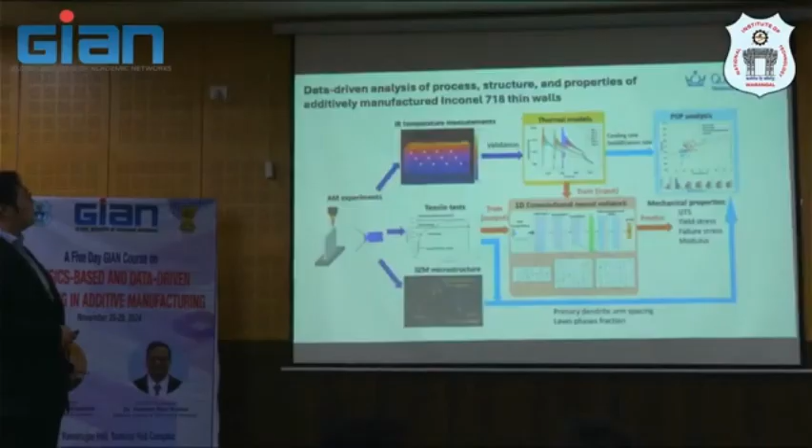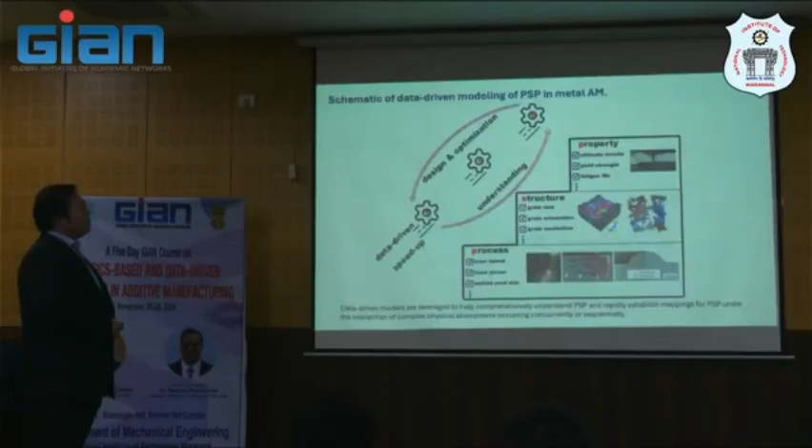Yes. Anyway, can you ask your question?

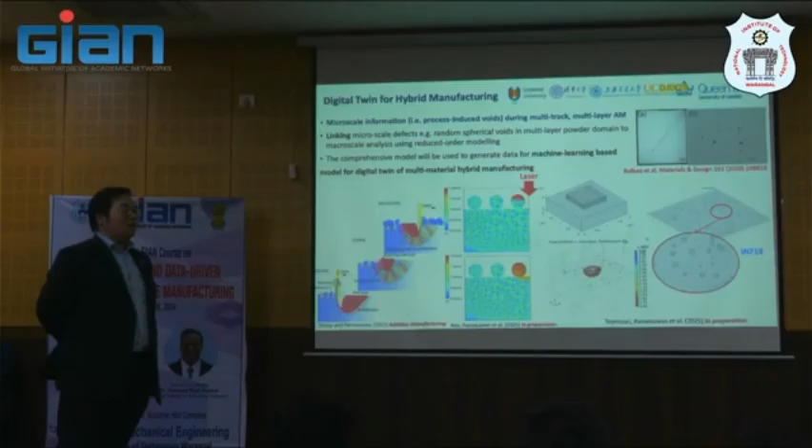How do we catch the weld pool size while printing? Whatever you showed in the weld pool size numerical model - while printing, with that laser speed and temperature, can we capture the weld pool size? You mentioned it was 210 microns. How can we accurately calculate that, sir?

Experimentally, is it possible? Yeah, there's a lot. Yesterday I showed you the measurement of temperature where people try to measure the size of the melt pool on the fly, meaning during the deposition. That's your question, right? How can we accurately capture it?

This is another research area for the monitoring institute people. They're trying to find a way, because they say the infrared information probably somewhat over or underestimates the melt pool boundary. I think this is related to instrumental things. As far as I understand, they try different ways to capture it, whether using a thermocouple, which is more reliable for engineers to validate against.

But it's impossible because this is a melting process. So the way forward, as far as I understand - I don't know much about this area but my colleague does, from Imperial - they try to find a way by changing the heat source as well, or the camera as well.

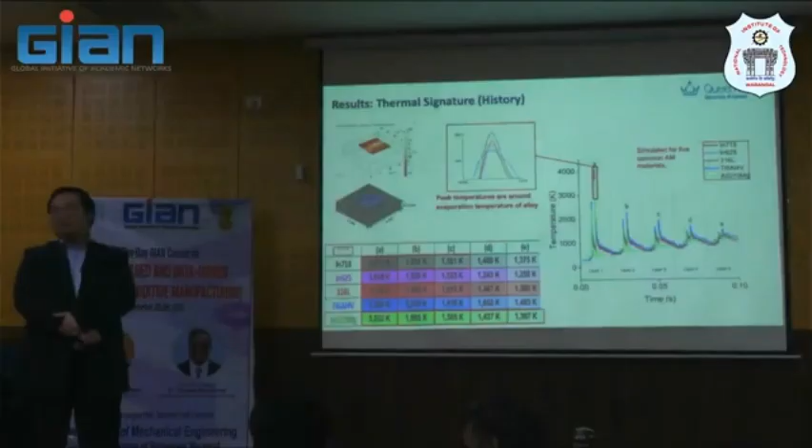So this is a simulated thermal profile - simulated, nothing to do with experiment at the moment. So how do we accurately get these simulated thermal signatures in comparison with the experimental thermal profiles?

When we see the experimental thermal profiles, the pattern is slightly different, and this seems to be an overestimate of the temperatures, right? In layer 2, layer 3, layer 4, the temperature is decreasing, whereas the general trend is that it increases.

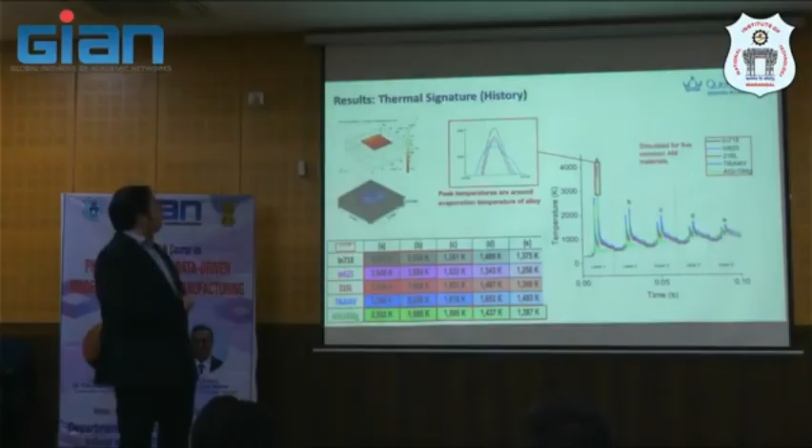I need to tell you, we are sitting at the same position when we measure the temperature. This position experiences - I'm staying at point A here, still here even as they add the second layer. That means this point experiences lower temperature as it passes, whether or not there's remelting. I'm not following the path, I just stay at the base of the material.

I agree - I understand the peaks A, B, C, D, E, and the temperatures go down as we go to the next layer at the same point. That's because we are at the same point.

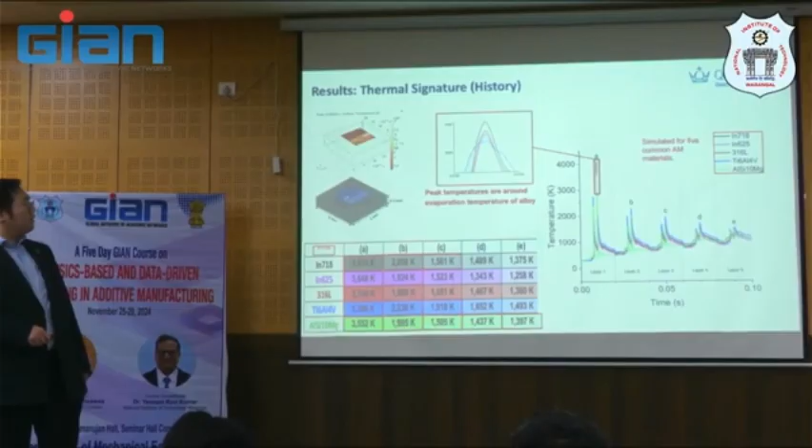But the baseline temperature trend is in an increasing mode, whereas in reality it is decreasing. Then we get an overestimate of the temperature, is what I feel. I think you spot the right point. Yeah, so I agree with you.

So what is the parameter we need to change here so that we get a more realistic trend? I think what we are looking at is probably the transfer coefficient at the substrate that may suck some heat out of the domain. But again, this still needs to be improved. As I said, we try to develop a framework using empirical relations or modeling to basically show the proof of concept of what we have. But anyway, you are correct.

Yeah, it's expected to be like this, even if it's slowing down, like I showed in the schematic diagram. Yes, sure.

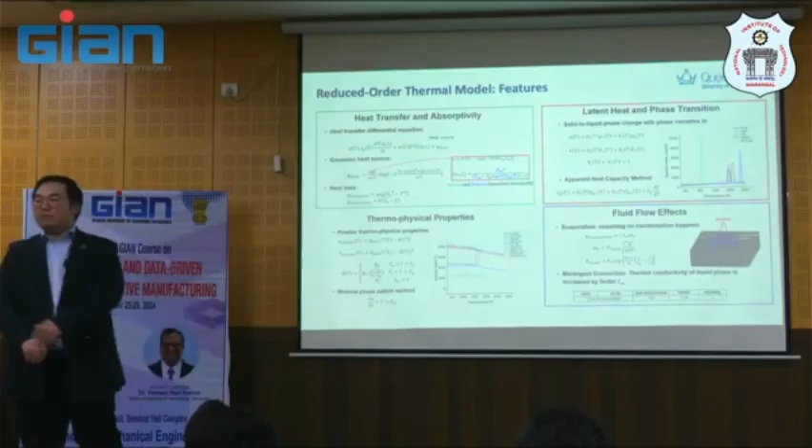It also contributes to that as well. You mean the dwell time, leaving some time before depositing the next layer? That's also what we consider. Again, this has to go hand in hand with experimental results to see what is the real representation for the situation. Agree, completely agree.

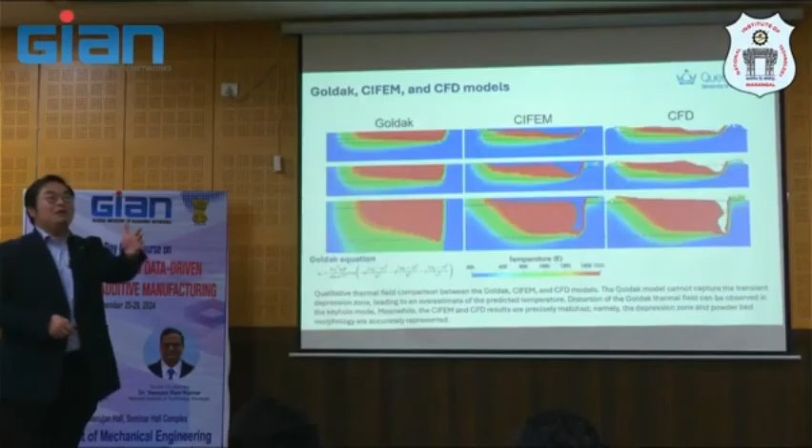I think his point is this, actually. This is why it's a little bit increased here. He said that in reality, probably, in order to capture what really happened, I also agree with you, that under the assumption made this is correct, but in reality if you compare, it will increase first and then decrease, right?

This is a measurement from experiment. It will increase first and then decrease. This is from experiment, but again, how you trust this IR imaging is another question.

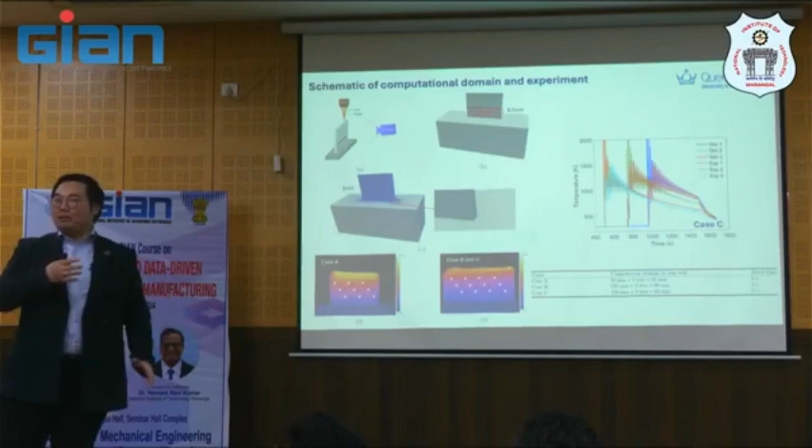So this is increased first, and I understand, he is also correct. But you see here, the first few layers are increasing. Again, after that, we need to calibrate carefully with experiment. So nothing wrong with the model, but under the assumption made, it is correct based on that.

But yeah, thank you so much. Any other question? I think I like a session like this, that we generate some discussion.

For better understanding of each other, can you please, in a quick way, say what you are doing here? Introduce yourself. Are you an experimentalist looking at instrumentation for melt pool, or are you a metallurgist looking at alloy development? I'm a mechanical guy. I'm not a metallurgist either, nor a material scientist, so definitely the perception will vary.